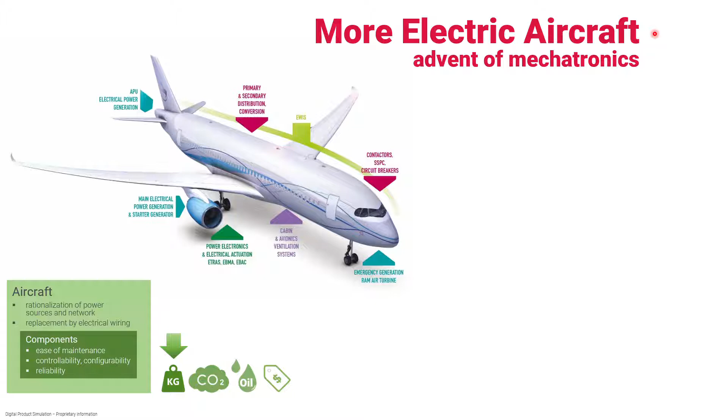The move towards a more electric aircraft represents a major technical breakthrough. This is generated by the mechatronics approach, which is by nature multidisciplinary. The design of these new systems, their integration into the overall system, is an iterative process that consists of a series of compromises. It is for this reason that we are interested in the case of the design and integration of an electromechanical actuator. It is a component which from the beginning must be thought of in all its dimensions and which depends on a multitude of surrounding systems. It requires technical mastery and close collaboration between several disciplines.

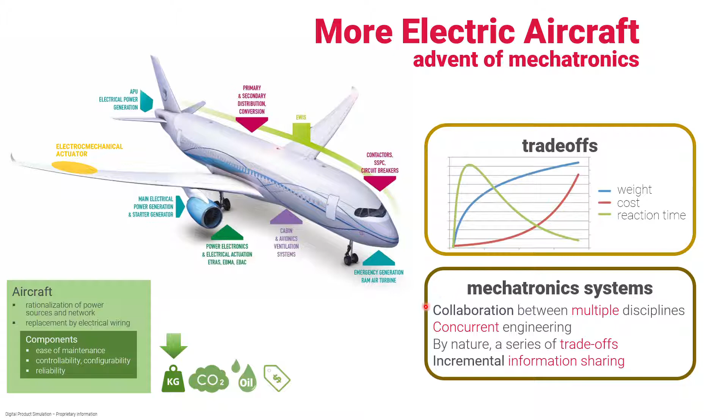First challenge to overcome: working in silos. It has been said that the hallmark of all successful organizations is effective communication and a collaborative atmosphere. It has also been said that silos are not conducive to this communication, that they are a source of non-productivity, that they slow down processes, etc. This is certainly true. This is a paradox. Silos have developed quite naturally over time based on a logic of grouping specific skills to promote efficiency. Whether you like it or not, silos have proven their effectiveness. They are not the real problem. It is illusory, even counterproductive, to claim to break them.

On the contrary, we want to organize collaboration from a different angle, by bridging different technical domains, by connecting their business applications to our current software. Our solution does not break down silos. It connects them and provides the necessary communication and collaboration flow. With Karren, a collaborative and connected engineering takes place and gives project managers and architects the possibility to step back from silos by detecting much earlier errors, technical conflicts, and inconsistencies between them.

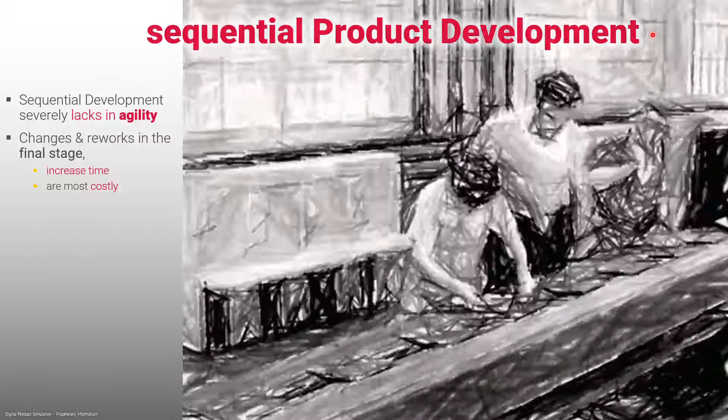Traditional sequential engineering is a linear product development process. The steps follow one another and focus on one area of expertise at a time. The role of each person is well defined, and the level of progress of the project is easier to follow.

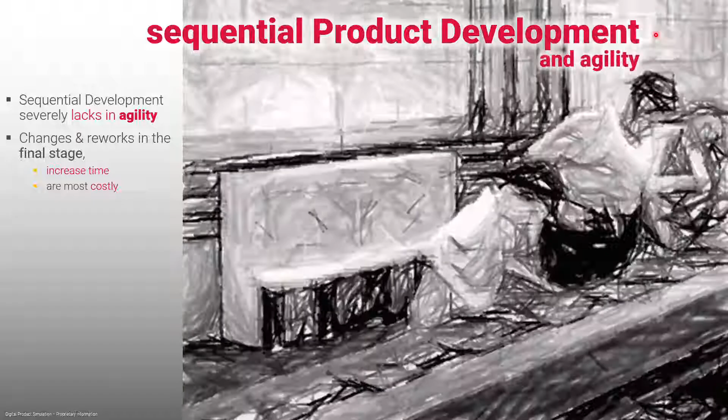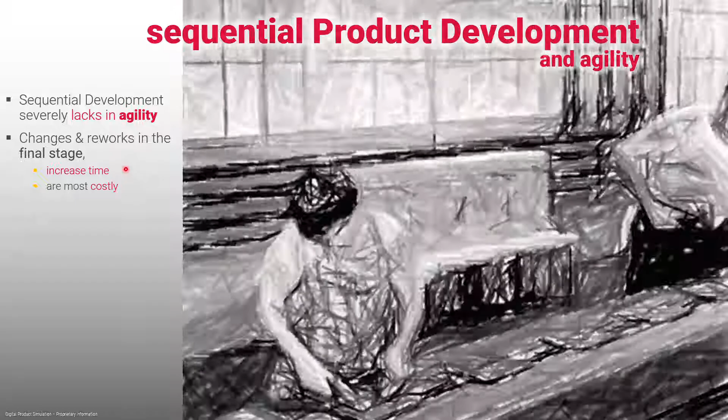The risk of a sequential approach lies in the non-existence of the information necessary for the development of the product at any given moment. As such, this approach is cruelly lacking in agility. Development times and costs increase due to the change requests in the final stages. This is not compatible with the development of a complex system.

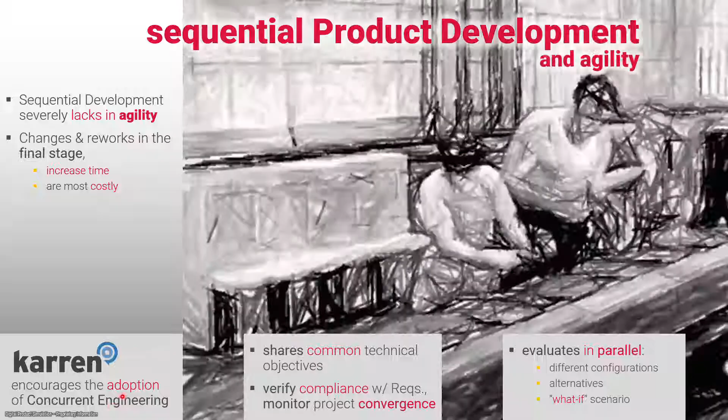Our method greatly favors the adoption of a concurrent engineering approach. Karren synchronizes the development processes of each team on shared technical objectives and verifies the convergence towards a common solution as well as the achievement of the product performance objectives.

Design changes are communicated to all relevant departments in a timely manner. The developments, the studies of alternative configuration, but also the evaluations of what-if scenarios are done in a concurrent way.

Data useful for product development is scattered in many systems: PLM, Excel, reports, CAE model, etc. The amount of time wasted searching for the right, up-to-date information is abysmal. We choose to manage with Karren only the information necessary for the collaboration. This is an efficient approach to get around the reluctance of some people to share their model, their files, or when confidentiality issues between customers and suppliers come into play.

This information is made up of data common to the whole project, high-level requirements, input-output between two distinct components, etc. The main principles that we implement with Karren are: we manage data at the parameter level. We do not manage models or files.

Karren is the central piece that connects, without replacing, all the business applications used in the product development cycle, CATIA, Dymola, Windchill, ANSYS, Excel, etc., and manages their information flow. Information sharing is incremental. As soon as the new information is available, it is integrated and shared.

Let's move on to our use case. You already know all this. The turns of an airplane are made with the help of ailerons controlled by the pilot and raised or lowered by an actuator. The aim of our work is to propose a preliminary study of this actuator with a more electric approach, and thus to replace a mechanical system by a mechatronics system. From a technical point of view, it is to explore different alternatives and 3 different possible architectures for the actuator.

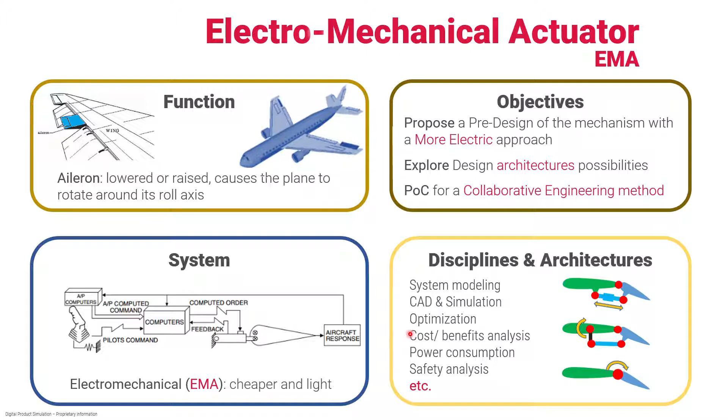But the objective of DPS is to define, test the agility and validate some concepts of our collaborative development methodology on a concrete case, notably by implementing parallel studies and what-if scenarios. We want to verify the ability of the tool to provide all team members not only with the technical information they need, but also with the information concerning the progress of the project and its convergence towards an optimal solution. For this purpose, multidisciplinary resources were involved in this complex project: specialists in system engineering, CAD, simulation, cost analysis, safety, etc.

Karren is a web application designed to manage the complexity of a company's projects and their knowledge. Here you have a view of the user interface where several projects are managed. The knowledge structuring is organized in three main elements. 1. The product vision, which consists of the requirements and business rules of the company, expressed in the form of mathematical formulas. They define the relationships between the parameters but also the objectives to be reached.

Second, the product knowledge, which gathers the key characteristics, the necessary and sufficient parameters for the collaboration, those whose value has an impact on several activities. 3. The points of view are there to reconcile the divergent technical interests defended by the teams.

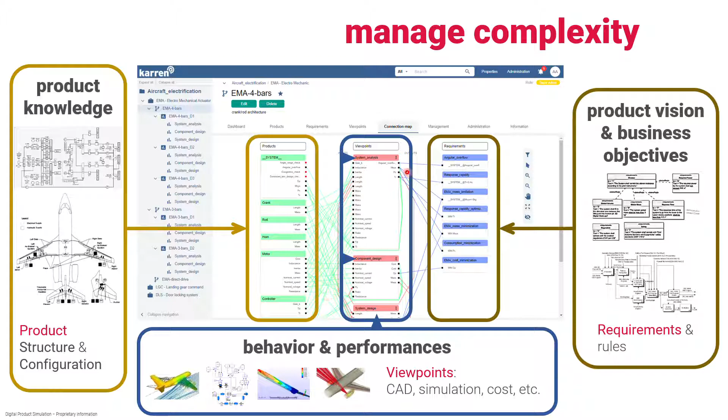Take the example of the EMA gearing reduction ratio. It should be small for the mechanical strength and high for the point of view of the transition time between aileron up and aileron down. An informed decision will be made to set a common value for these common parameters. Finally, the consistency between requirements, viewpoints, and collaboration parameters is achieved by a mapping that links them.

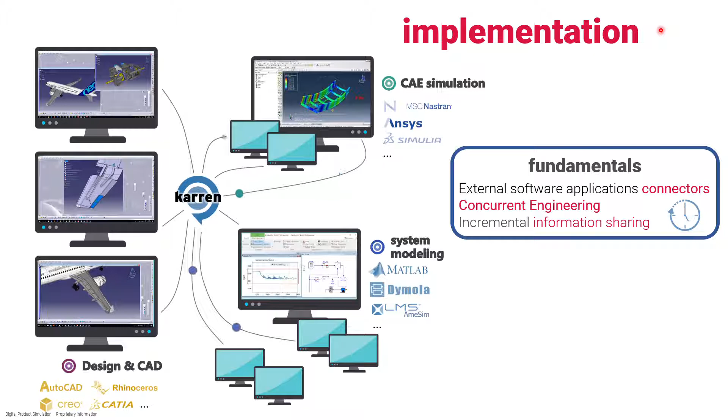Let's see now how we implemented the case. First, we have connected to the Karren database the CATIA and Dymola software used by the system modeling and 3D modeling experts teams. Let's see how the project progresses.

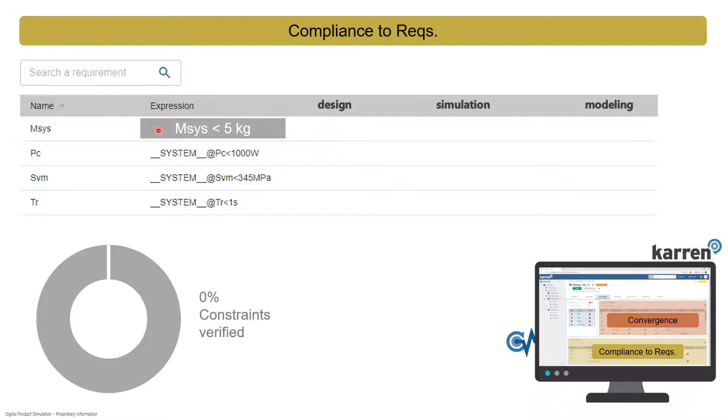Karren is connected to the product requirements management application. The design parameters are constrained by one or more of these requirements: the power consumption, the response time, and here the mass of the system, which must be less than 5 kilograms. The information is retrieved and Karren then indicates the state of the requirements at that moment. The system is not reactive enough, the response time is too long.

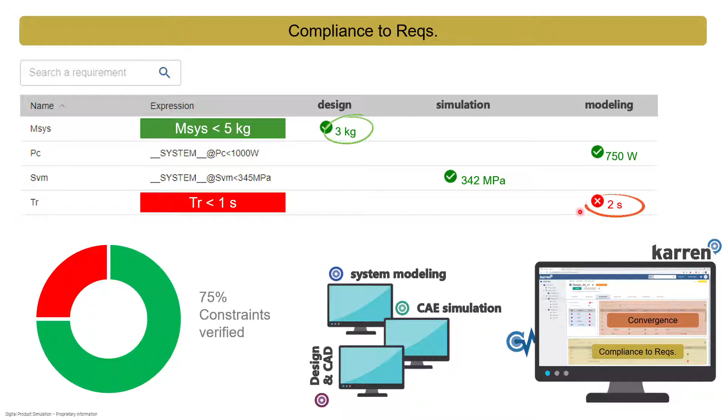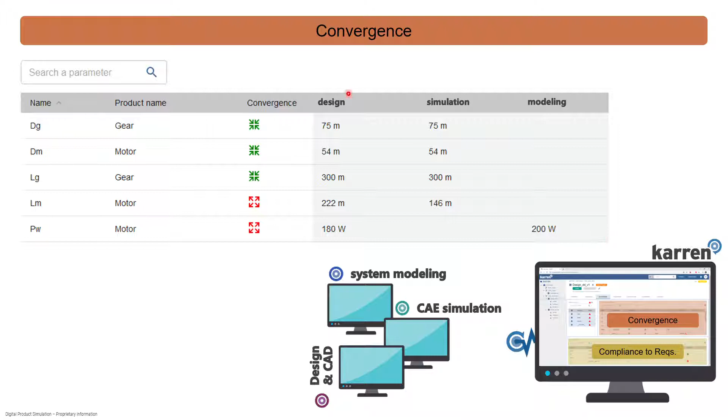Let's see the convergence table. It lists the parameters common to several disciplines and their values when they exist. The design team is currently forecasting a motor power of 180 watts, while the modeling team is looking at a value of 200 watts. Karren identifies the incompatibilities between the proposals of the different actors common in the early phases.

The project leaders are informed and engage in discussions to find a compromise. In our example, the common value of 180 watts is finally retained. The system modeling team will have to explore the options necessary to achieve this value. The simulation team advocates for a very compact motor to optimize performance.

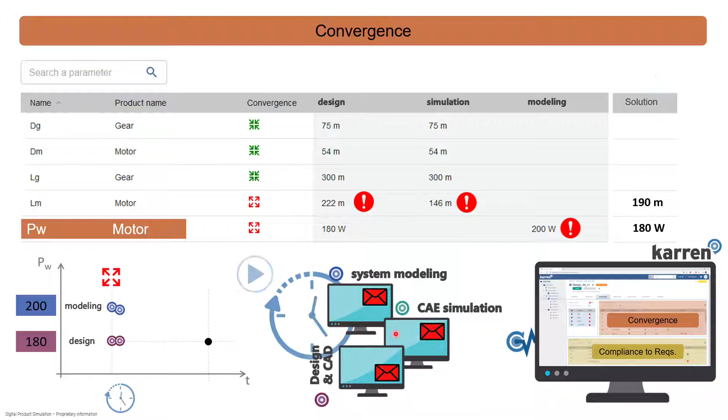On the other hand, the implementation of such a solution poses real difficulties for the system modeling team because of interference issues with other equipment. But the solution they propose is not satisfactory. Discussions between the parties lead to a compromise. The engine footprint must be reviewed on both sides. An intermediate value is set as a common goal.

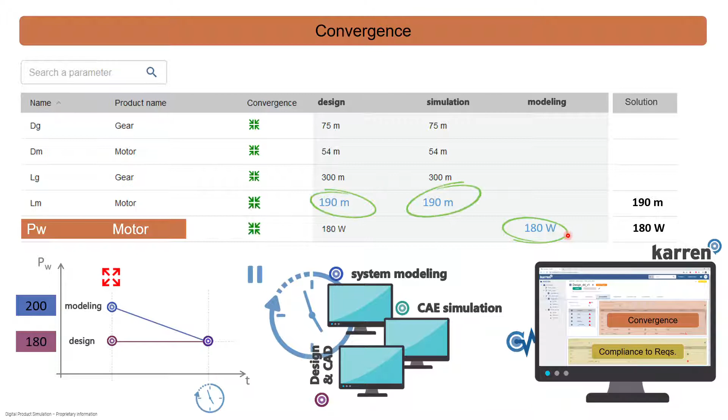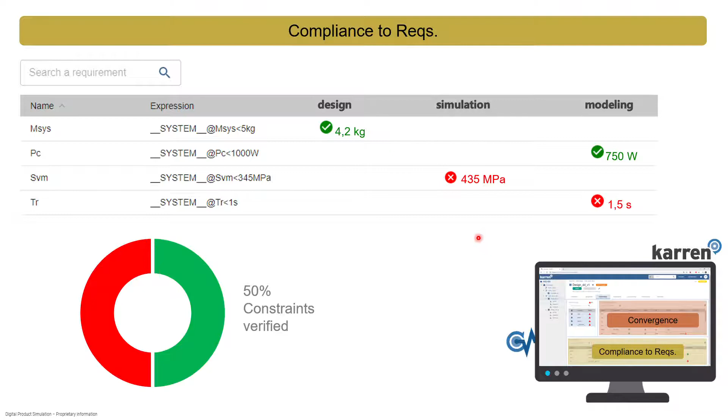As they progress, the designers send their value proposition to the other teams via Karren. This allows the project manager to monitor convergence. Compliance and convergence charts are complementary. During a complex project, the resolution of a problem sometimes leads to consequences elsewhere. In our example, it is on the simulation side, in terms of mechanical strength, that there is now an issue.

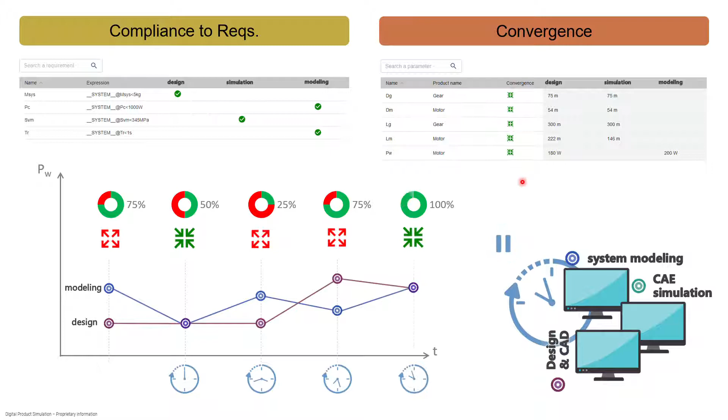Nothing is ever simple. So over time, convergence and compliance evolve. The dashboard of Karren provides an essential steering tool for all actors and provides the key information necessary for informed decision-making.

Let's go back to the problems we identified and wanted to solve. Silos do not collaborate easily. They are the result of a logic of grouping skills that promotes efficiency. In this project, rather than breaking the silos, we decided to bridge them together and allow the exchange of data essential to collaboration by connecting business applications to Karren.

Sequential work does not allow to explore the whole design space. Time is lost waiting for the necessary data. On the contrary, Karren favors concurrent engineering. With short cycles and few iterations, we studied 3 architectures of an electromechanical actuator and several of its variants.

Deadlocked configurations are detected very early and eliminated thanks to compliance and convergence indicators. It is then easier to compare the designs and to discern on tangible criteria those with the best performance trade-off.

Data is everywhere. It is in CAD models, in simulation results, in the Excel spreadsheet on your desktop, on post-it notes. Karren is a missing piece to manage technical data at the parameter level and the exchanges necessary for collaboration. It connects to existing systems and enables incremental information sharing between teams. Time wasted searching for information or reprocessing it is greatly reduced.